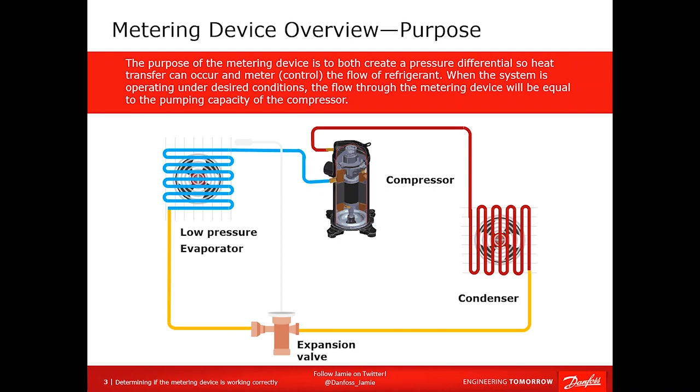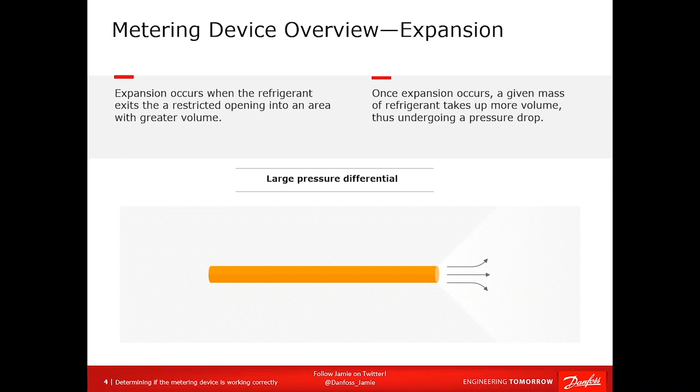The second thing is it has to inject refrigerant into the evaporator at a saturated state to replace what is boiling off into a vapor and being sucked in by the compressor. Otherwise, your evaporator would run out of liquid and things wouldn't work that great. So what does the expansion part mean? Well, when you go through a metering device, you're either going through a small opening or down a narrow tube, and you have high pressure, confined spaces, friction losses, etc. When you leave that confined space, you suddenly increase in volume. And since you are expanding, a given mass of refrigerant taking up more volume is going to undergo a pressure drop. And this is key to how a metering device maintains a low temperature in the evaporator.

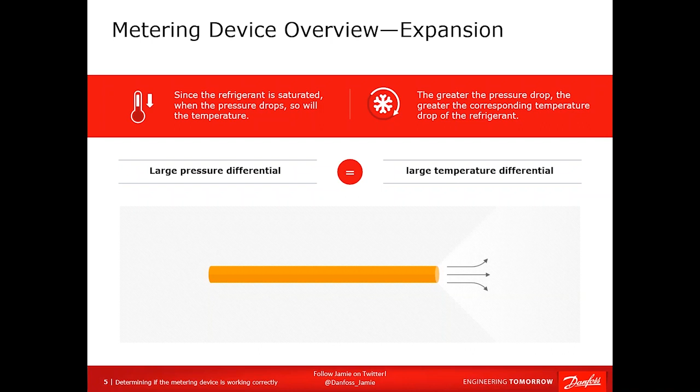Why? Well, the refrigerant is saturated. If it's saturated, vapor and liquid, you have that pressure temperature relationship. So you have liquid leaving, some vapor leaving, you have a pressure drop, you therefore have a temperature drop. But remember, there is no net energy change in the refrigerant. The refrigerant leaving the metering device has the same BTUs per pound as it does when it leaves the condenser. So flash gas. Flash gas is the vapor part of the saturated condition. So when you leave a metering device and you get expansion, you get flash gas occurring.

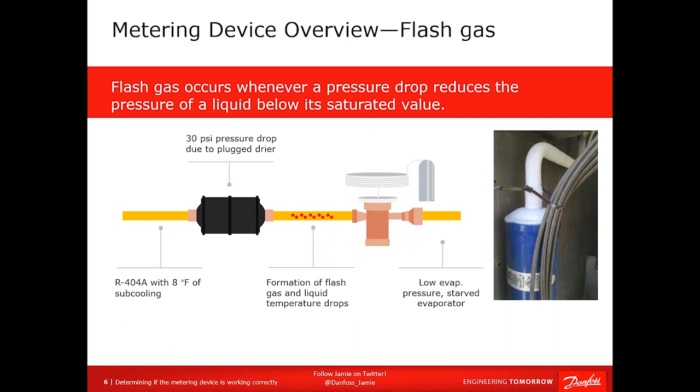Now, a lot of times we hear of flash gas as something that we don't want. If it occurs in a liquid line, it's really going to cause problems at the metering device. However, flash gas is just the ordinary outcome of any pressure drop that is equivalent to or greater than the subcooling of the refrigerant. So you'll see situations where this can occur in plugged components in a liquid line, but in the metering device, this is a necessity that we have to have in order for that refrigerant to drop in temperature. Why? Well, simple. Saturated R134A at 100 degrees contains 45 BTUs per pound.

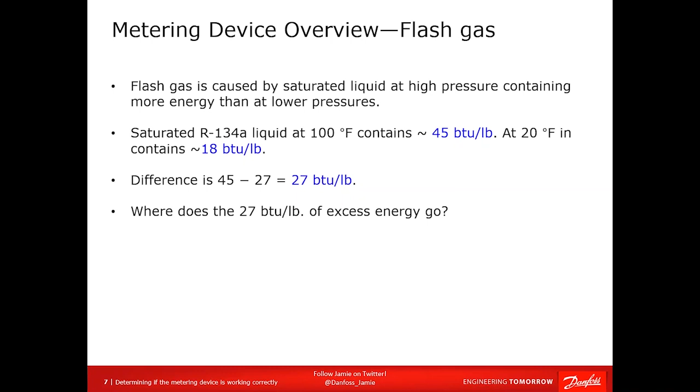If you want to inject it at 20 degrees into the evaporator, well, saturated 100% liquid at 20 degrees only can contain 18 BTUs a pound. That means there's a difference of 27 BTUs per pound that you need to account for in order to have liquid or saturated liquid at 20 degrees. So where does the 27 BTUs per pound of excess energy go? It goes into making that flash gas.

Now remember, vapor holds 5, 6, 7 times more energy than liquid does at the same temperature and pressure. So by dropping the pressure around the liquid, it suddenly boils, it flashes very rapidly and forms this vapor. And that vapor is what holds that excessive energy. So if you want to know how much vapor you're going to produce in the previous example where we had 27 BTUs of excess energy, well, you're going to produce 27 BTUs worth of vapor, and the remaining liquid is going to be at saturation.

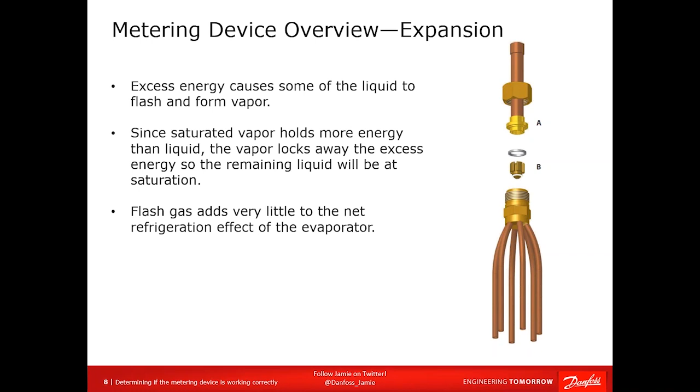Now, the liquid does all the work in the evaporator, going from a liquid to a vapor. The flash gas does very little. It's just along for the ride until the very end. All right, so if you can reduce flash gas by subcooling or pulling more heat on the high side, you can actually increase the amount of heat absorbed in the evaporator.

So let's start with the most simple metering devices. Simple openings, orifices, pistons. All right, you'll see a lot of these. You'll even see them in the large centrifugal chillers. They look like a floor drain. These are very simple metering devices. They have a given size opening, and the amount of flow that goes through a given orifice, all else the same, is determined by the pressure drop across it. So if you have a given pressure between the high side and low side, that pressure differential will determine how much flow goes through it.

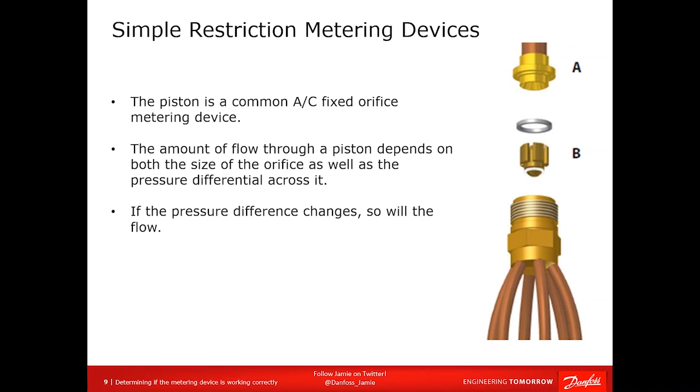And this is important because with pistons, as you'll see later on, the amount of flow and hence the amount of refrigerant in the evaporator, the amount of superheat and everything else is determined for a given set of conditions solely by the pressure difference across it. So with a cap tube, you size a cap tube for a given refrigerant and a given set of conditions, you size it for a given capacity. And the lower the operating temperature, the smaller the capacity, the longer you are going to have a given size of cap tube. So if you shorten a piece of cap tube, you'll end up with more flow through it and a higher evaporator pressure and temperature. So once again, cap tubes are cut to size based on evaporator capacity, temperature, and differential pressure.

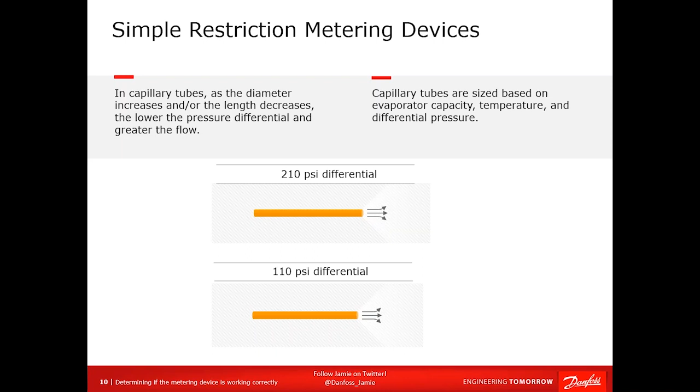If you've ever done this, you'll have the box with the cap tubes in it, and on the back or in a sheet of paper or document, you will have the size of cap tube and the length you need to cut it for a given set of conditions. Now, cap tubes are a little different than pistons because you don't have that 100% relationship between pressure difference and how much flow goes through it. And that is simply because cap tubes also have a friction element to it. Now, getting into this is beyond this presentation, but again, they just don't have that same simple pressure flow relationship like pistons.

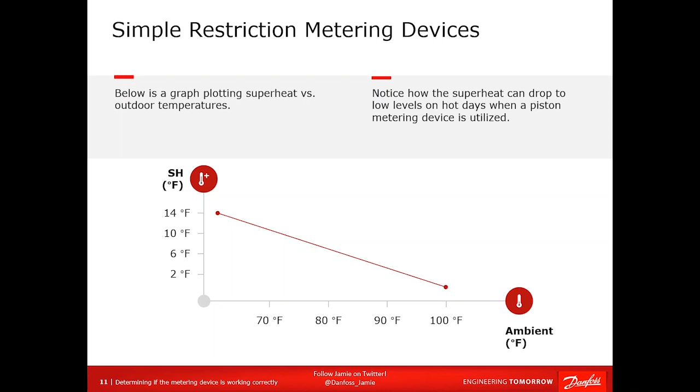If you artificially inflate the pressure or temperature in the condenser by 10 or 15 degrees, either by overcharging or poor airflow, you can easily get into a situation where you are going to flood the compressor. And this is a problem because a lot of compressors come back, even scrolls, with seized bearings smashed all up inside. And really, a lot of it comes down to this type of situation.

So you've got a fixed metering device in your system. How do you tell if it's performing correctly? Well, straightforward, it's compared to the manufacturer's literature. So if you have an AC system, and we'll see in a second, it will tell you exactly how much superheat you should have for a given outdoor and indoor condition. In fact, this is what you use to charge a system. So if you're not familiar with this chart and you've been charging systems, something wonky is going on.

So if your superheat is too high or too low for a given ambient condition, keep in mind these are not adaptable controls. It's not like there's a knob on the side of a piston or a cap tube that you can turn that suddenly gives you less or more refrigerant like you can on a TXV. So it really comes down to what is going on in the system. Is the metering device sized properly? Is it plugged? All these kinds of things now come into play.

So if your evaporator temperature is too low and your superheat is too high, then look upstream for any obstructions. You do this anyways, regardless of what's going on. If you have that low pressure, high superheat type of scenario, look for plugged filter dryers or plugged valves or whatever happens to be upstream. Also, if you have a cap tube, make sure it itself is not plugged. If you have what looks like pure liquid entering into a cap tube, and you're getting very low flow on the other side, there's a good chance it is going to be plugged with wax or something like that.

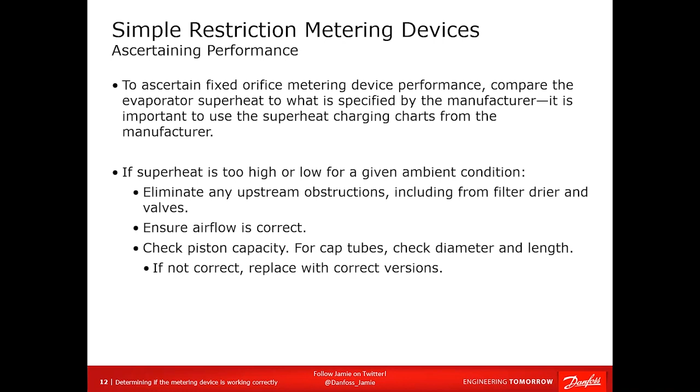If your evaporator temperature is low and your superheat is low, make sure you have enough airflow and that your evaporator isn't iced up. And once again, check the piston capacity. If you have to pull it out, check to make sure you have the right one. If you have a piston that is too large, expect high evaporator temperatures, low superheat. In fact, you could probably expect flooding of the compressor on hot days. Once again, for cap tubes, a little more involved, check the diameter and the length and compare it to what the system is supposed to be. Believe it or not, when a cap tube is sized right and cut right, it feeds beautifully, especially on indoor applications where you have a relatively constant condensing.

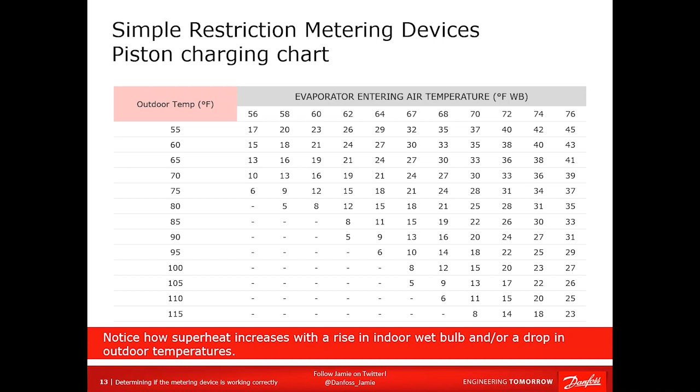However, if it is hot outside, really hot, like 100 degrees or 105 degrees, and it's not wet inside, you don't have high humidity, now you're going to flood the compressor. So these systems have to be tailored for regional variances. If you live in a place where the air is very dry, you have to size a system differently, the piston, than what you would if you lived in, say, Atlanta or Alabama, where it's both hot and humid.

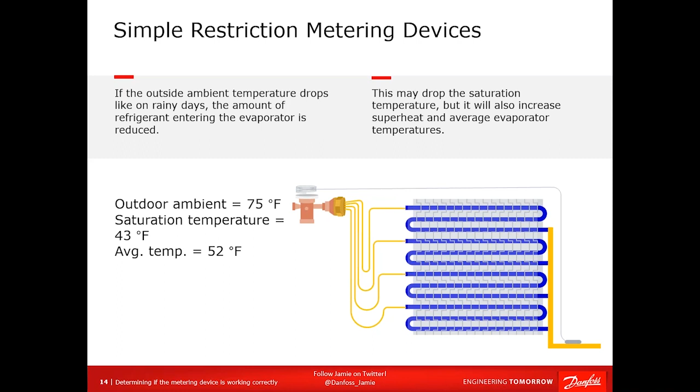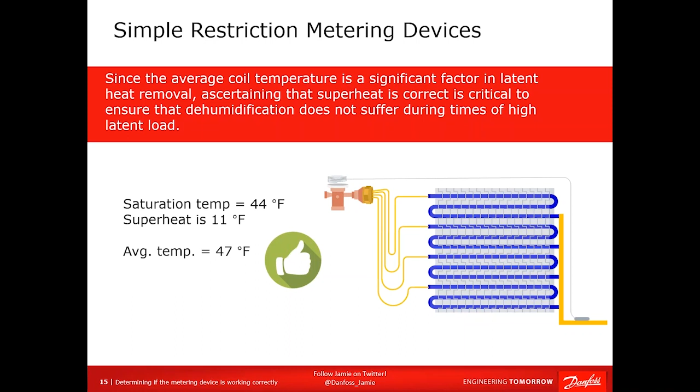In other words, it doesn't matter if it's sensible or latent heat, you end up with more capacity to match that load, which means you get lower superheat, lower average coil temperatures, and better dehumidification, like you can see in this picture here. All right. Again, I could spend a whole presentation on just this one area, and we don't have time. But one of the biggest selling points of an adaptable control like a TXV is simply when it comes to that dehumidification. Why? Well, here you go.

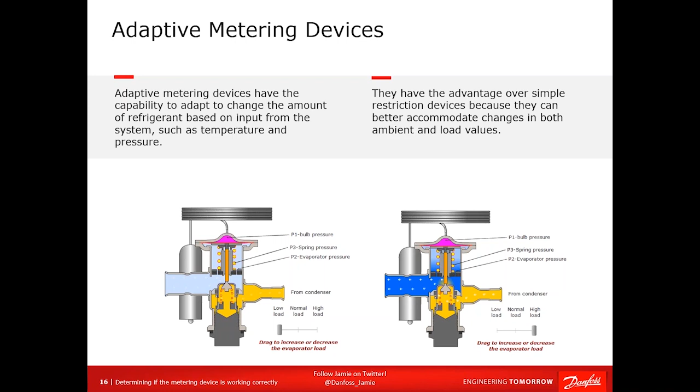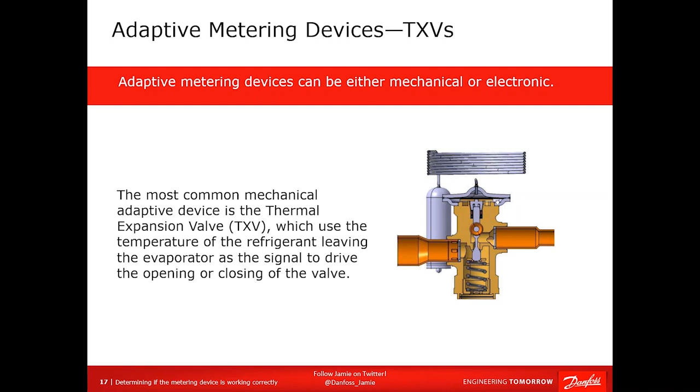So TXVs are very, very common nowadays in AC. All right. And of course, in refrigeration systems, larger refrigeration systems, they have been there for a long time. However, on the AC front, residential AC really changed in 2006 when SEER 13 came in. It was during that period of time when efficiency increases were mandated in AC, and a lot of manufacturers went with TXV, and the entire market turned upside down, where the majority of metering devices going out switched from pistons to TXVs because they could get you a large chunk of the way there as far as necessary efficiency goes.

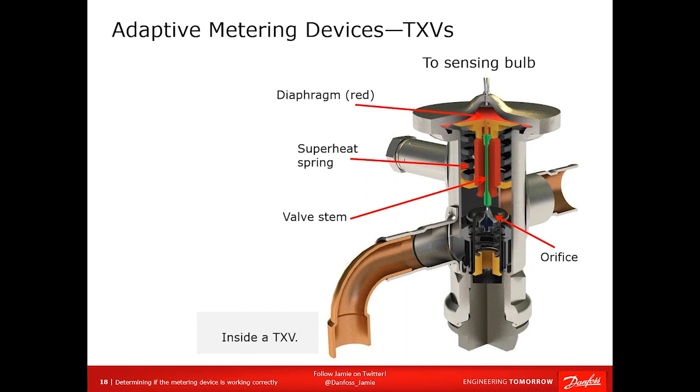So looking inside of one, this is a cutaway of one of our refrigeration TXVs. In fact, it's one designed for ice machines. And you'll notice that at the top, you have your diaphragm. You have a pressure plate in beige underneath it. And then you have your valve stem in green. The superheat spring surrounds that and is adjusted by the stem on the left. Near the middle there, the black, you'll see that's the orifice. So when the sensing bulb pressure increases, it causes the diaphragm, in red, to be pushed down against the spring, pushing that orifice pin down in the middle, opening up the orifice and allowing more flow through here. In this case, the flow goes from left to right. If I reduce superheat, I reduce the force of that spring, allowing the valve to open up with less superheat.

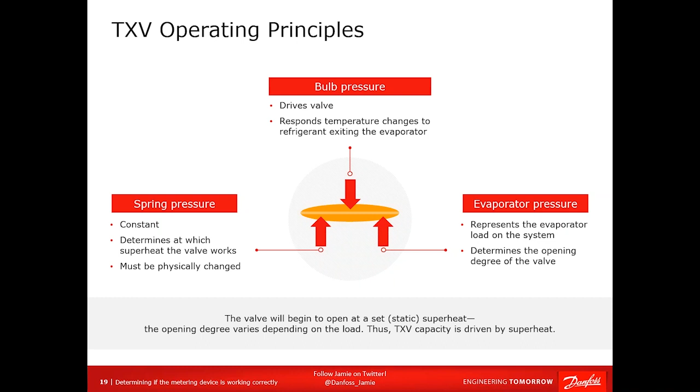So there's two key things to remember here. Number one, the bulb pressure is the only opening force. The evaporator and spring pressure are both closing forces. So in order for the bulb to cause the TXV to open up, it has to overcome both spring and evaporator pressure. Now, that's why you don't have a TXV opening up at 0 degrees superheat, because of the contribution of your spring pressure. So if the valve is rated for 7 degrees of static superheat from the factory, it means that you need at least 7 degrees of superheat for the bulb pressure to be high enough to overcome that spring pressure. So when you adjust the superheat on a TXV, you are really increasing or decreasing the contribution that that spring puts in.

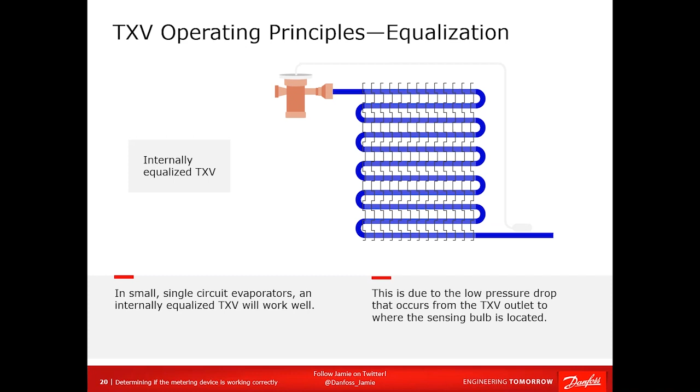Next important point here is internal versus external equalized TXVs. I see a lot of questions, a lot of discussion on this. A lot of people don't seem to understand the underlying reasons why you may need an externally equalized TXV. Well, it's pretty straightforward. It all has to do with the pressure drop that occurs between the TXV outlet, the inlet of the evaporator, and where the sensing bulb is located at the outlet of the evaporator. If you have a small pressure drop, equivalent to a couple of degrees, let's say, the internally equalized TXV will work just fine.

However, if you have a multi-circuited evaporator, one that has multiple circuits to allow for a more even evaporator face temperature, then you have to use a distributor. And refrigerant distributors are notorious for having very high pressure drop, anywhere from 5 to 30 pounds. Now, here's the rub. Whatever temperature equivalent that pressure drop is equal to, you're going to have to add to the superheat setting of the TXV, because the TXV doesn't know there's a pressure drop downstream of it if it's internally equalized. So it thinks the evaporator saturation temperature is much higher than it really is. It might think it's 40 degrees when in fact it's 25. So whatever temperature difference that pressure equivalent is equal to, you would add to the opening, static superheat.

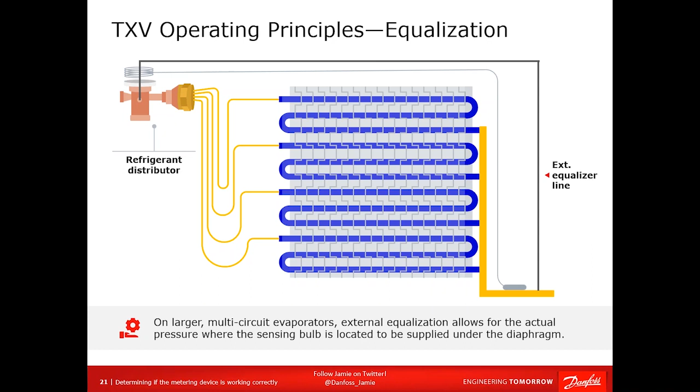So if you had a 10-degree equivalent pressure drop and the static superheat on the valve from the factory was 7 degrees, 10 plus 7 is 17. Your valve would not even open up until you had 17 degrees of superheat. You would always underfeed the evaporator, and it would be a disaster. So by going with an external equalized valve and attaching the external equalizer line just downstream of the sensing bulb, you get the actual saturation pressure where the sensing bulb is located, applied under the diaphragm, so that you have like for like forces on that diaphragm.

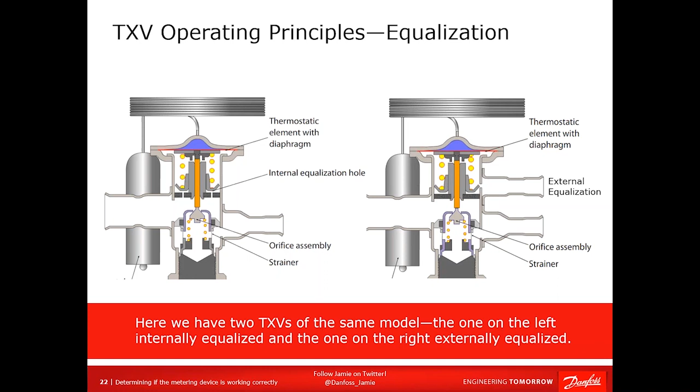So here we have two TXVs. Both of these are TUAEs. The one on the left is internal equalized. You can see the opening in this area right here that allows the evaporator pressure up and under the diaphragm. The one on the right, it's closed off, but we have an opening on the side. So we cannot let the evaporator pressure here up there. We take it from the outlet of the evaporator after all the pressure drops and apply it up under that diaphragm. So once again, you get a much more accurate picture of what the conditions are inside the pipe where the sensing bulb is.

So the rule is you can use an external equalized TXV even if you don't need one. You still have to connect the external equalization line. Keep that in mind. However, you can never use an internal equalized one if you require an external equalized TXV. If you have a distributor, you absolutely should have an external equalized TXV. That's why you'll always see external equalized TXVs on air conditioning systems.

So, superheat and load. Different manufacturers take different approaches to this based on what mixture they put in the bulb charge, and we'll talk about bulb charges in a second. However, in order for you to compress that superheat spring, the more you push down, the harder it pushes back up again. So you need more bulb force to continue opening that TXV. To drive it wide open takes much higher bulb pressure. Now, you can increase some of that bulb pressure just by having a different mixture. However, you're always going to have an increase in superheat under high load. It's not going to be as much as you would with a piston or a cap tube or whatever, but there is going to be some. It might be 4 or 5 degrees of superheat difference between closed and your rated capacity.

And we call this opening superheat. When you measure superheat leaving the evaporator, you're measuring operating superheat. And that is both your opening and static superheat combined. So if somebody says, I've got 12 degrees of superheat at the evaporator outlet and your static superheat is 7, you have 5 degrees of opening. And every TXV has a certain amount of superheat to drive it to its rated capacity. However, all TXVs that I've ever run across have what's called reserve capacity or extra capacity. It might be 20, 30, 40% above what it's rated for.

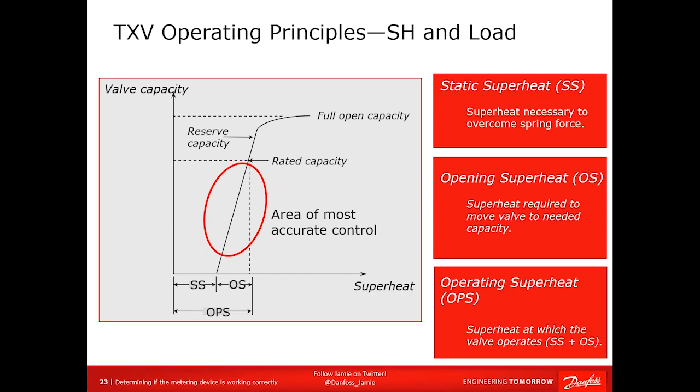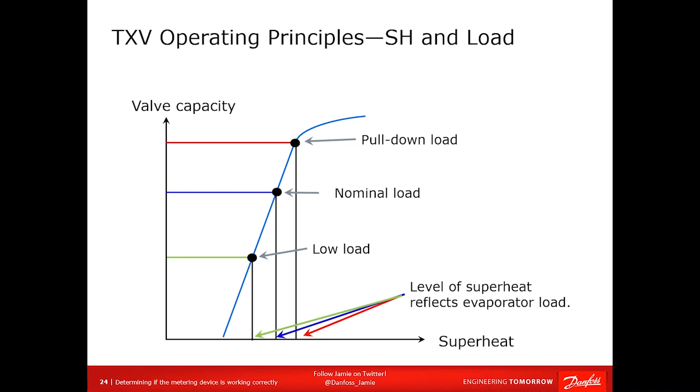Why don't we rate it for a 1.4 ton valve instead of 1 ton? Well, because that is really not a place we want that valve to be running all the time, because it doesn't have that same accuracy as far as amount of opening compared to a given amount of superheat. It is far more accurate in this area down here. And this is really where we want to operate most of the time. If you're in pull down mode, it's okay to be up here for a short period of time until you get that load pulled down, but you don't want it operating up there all the time. So once again, your superheat is reflective of your load. Some manufacturers will have less change, some will have more, but all of them will have some.

Okay, now the important part. In order for you to understand if a TXV is working correctly, you have to understand what it does under different conditions. So you can tell if there is something wrong with the valve itself, or if there is something wrong in the rest of the system. So you have to know what the TXV is going to do, what you expect. Because if you don't, how are you going to know if it's operating properly or not?

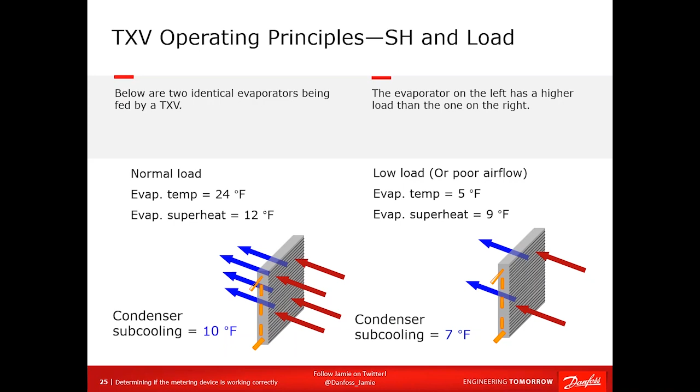So before you add refrigerant, check all 3 of these parameters. Before you adjust superheat, check the 2 parameters, evaporator temperature and superheat, and verify them before you make adjustments. Because if you go making adjustments or adding refrigerant, and that's not the problem, now you've just added more issues to deal with. And the more unknowns you have, the harder it is to solve a problem.

So let's look at the next part, that mystery material that's inside of the sensing bulb. Now, a lot of people think, oh, it's got the refrigerant in there. It's an R404A system, it's got 404A refrigerant in there. No, it does not. These have not been charged with straight refrigerant since, I don't know, Carrier was alive. It is a mixture of different gases or different chemicals depending on what you want to do. Yes, it probably will have R404A in there, but it will also have a bunch of other stuff like nitrogen and some hydrocarbons, or who knows what it's going to have in there.

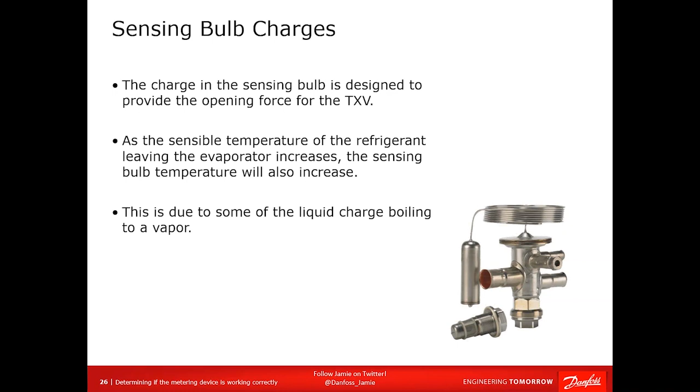But really, what you want to do here is have this work over a wide temperature range. In order to do that, you're going to have some of the material, some of the liquid in there, boil off quicker and some boil off slower, so that you can tailor how that valve reacts to a change in load. Now, the wider the operating temperature you want to work at, without having to change bulb charges, the more complex the bulb charge has to be. So with our N charge, we work from -40 to +50. It's great. But we also have a multitude of different materials in that charge. It's not just straight refrigerant.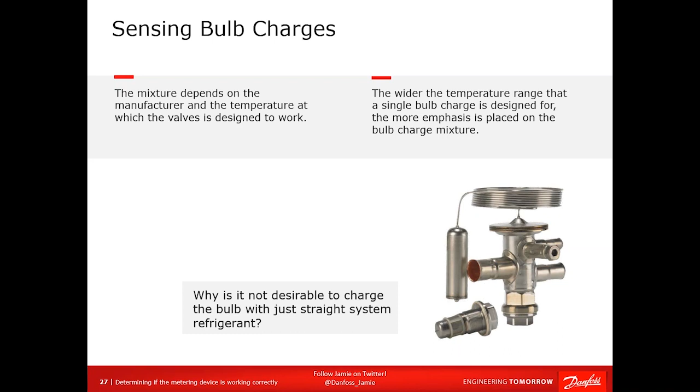So the question is, why would you not want to put straight refrigerant in there? It's very straightforward, because the amount of pressure required to change the temperature a certain amount, or vice versa, the amount of temperature change that's required to change the pressure, is not constant in refrigerants. In other words, the amount of pressure change for a given temperature change is much smaller at low temperature than it is at higher temperature. So if you look at the chart here, we're going from 15.7 to 19.3. That's 3.6 psi to give you a 5-degree temperature change. Whereas on the right, it requires a 17-pound difference to give you a 5-degree temperature change.

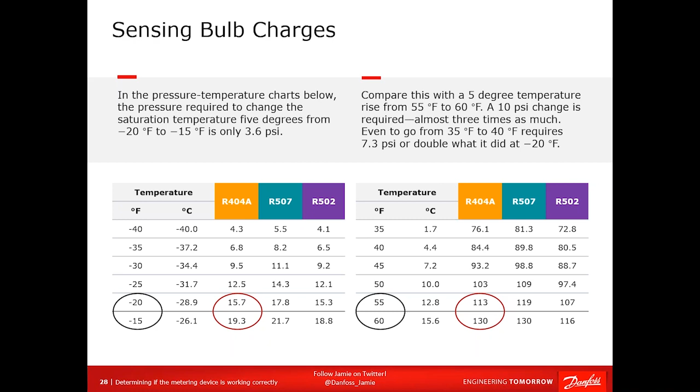So even if we don't go to that extreme, you can still see what the problem is going to be. And it comes down to this, the superheat spring. The superheat spring applies the same amount of force, whether you're running at -40 or +50. It doesn't know the refrigerant temperature. All it does is push back a certain amount. Now, nominal ratings for a TXV are done at 40 degrees Fahrenheit. So if we say this spring force is equivalent to 7 degrees of superheat, that is at 40 degrees. So if we look at a 7-degree change at 40 degrees, that is 12 psi. In other words, this spring pressure always pushes with 12 psi of force.

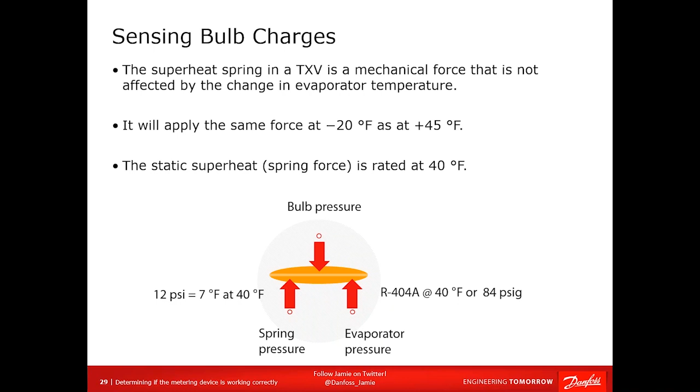All right, so what's that mean? Well, if you're going to run this thing at -20, and you want to overcome 12 psi of force, look how much superheat you're going to have. It's not going to be 7 degrees at -20. It's going to be a lot more than that, because 5 degrees is only 3.6 psi change. So how are you going to get 12 psi?

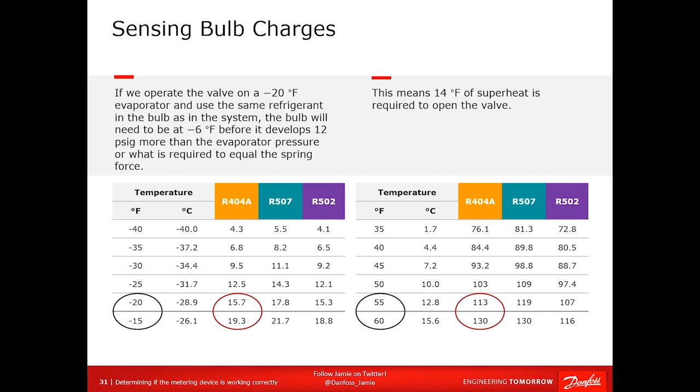Well, in this case, you're going to have to bump the temperature from -20 to -6 before you get 12 psig. This means you're not going to open that valve unless you have 14 degrees of superheat. So you will find that your opening superheat goes up at low temperatures if you were just to use a standard refrigerant, and vice versa.

At high temperature, you would overcome that spring pressure with very little superheat, possibly causing the evaporator to be unstable. That's why we always use a mixture. Okay, so how do you know if the TXV is operating correctly?

Well, that previous example that you saw where we had a drop in load and a drop in evaporator temperature, a drop in superheat, and stable subcooling, I gave that as an example of something that's not a metering device problem. There is no change that you can make at this point that is going to improve that situation. So it's either going to be an airflow change or a defrosting situation or something else that needs to be addressed.

So always make sure you check airflow. Make sure that you have the correct airflow for the situation. Otherwise, if you don't have correct airflow, none of this other stuff matters. There's nothing you can do that's going to improve it, because you're not going to have the load that the system was designed to have. So check what your airflow is. It's going to be over a range, but you can compare it to what the manufacturer wants, or you can look at the system. If it's a block of ice, there's something wrong.

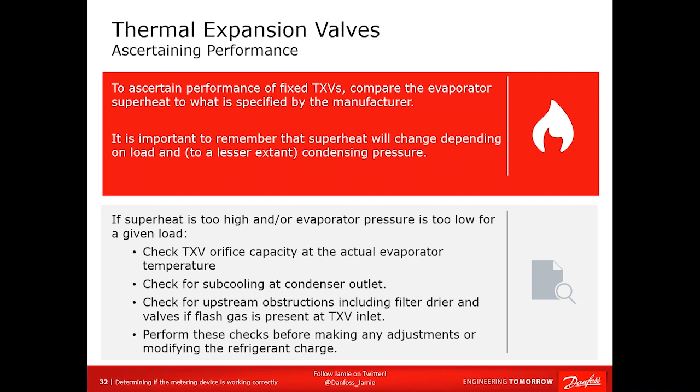And if you have flash gas at your metering device, you're trying to force vapor through a little tiny opening. That's going to be a problem. So you're going to end up with a low evaporator temperature and high superheat because you don't have enough refrigerant for the load. So make sure you do these checks before you do anything else. Trust me on this one. I've been burned myself with this. So it's a very quick check. Your hands, your eyes, and your ears will tell you a whole lot about this, okay? Without ever having to take out a tool other than maybe a thermocouple to take a measurement.

All right. So a low evaporator pressure must be accompanied by high superheat to indicate a lack of refrigerant in the evaporator. If you have low evaporator temperature and low superheat, that is a load issue, and you must treat it and solve the problem as a load issue. If pressure and superheat are low, once again, check your airflow. Check to see what is going on. All right. If everything else is okay and you've eliminated all these other possible problems, you can adjust superheat.

Remember, when you adjust superheat, the valve will react instantaneously. In other words, if you reduce superheat, the valve will immediately inject more refrigerant into the evaporator, and your evaporator temperature will go up and your superheat will go down, and vice versa. The reason we tell you to wait 10 minutes is for the system to stabilize, and this is very important. However, if you're determining if the TXV is functional or not, as soon as you put a couple of turns in, if you see no response, something is wrong inside the valve.

So hold the sensing bulb in your hand and warm it up. Don't put a torch on it. Don't put it in boiling water, anything stupid. Just hold it in your hand and warm it up. If you see a response, this tells you the valve was probably stuck and the larger pressure differential was enough to overcome any issues. However, if there is no response, then one of two things: the valve is really plugged or you've lost your bulb charge. It doesn't matter. The valve's got to come out.

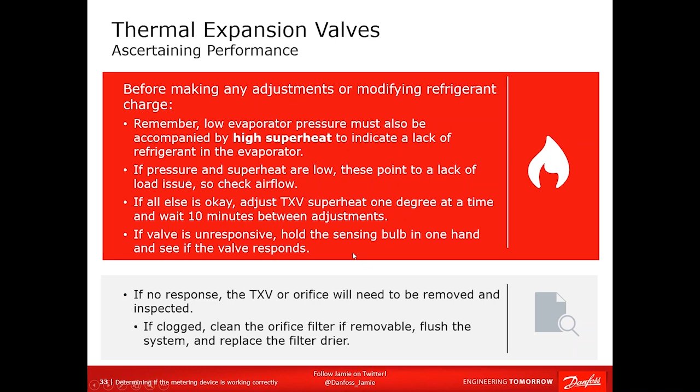All right. Well, before you condemn the TXV, take a look at the liquid inlet. You'll see a screen there. It may be removable, like in the TUA, or it may not be. But even if it's not removable, if you see it's plugged up, that tells you the reason for the failure. The recommendation then, of course, is to replace the TXV, replace the filter drier, and wonder why it didn't catch the problem, right? And I would recommend flushing the system because you've obviously got debris in there that's going to cause a problem. All right, that's my recommendation on what to do.

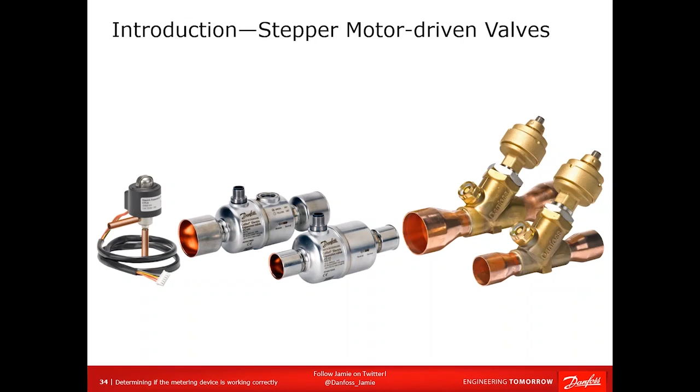Okay, finally, we're going to deal with electronic expansion valves. Now, just like TXVs made an entranceway into lower end systems, electronic expansion valves are now making their way in. Just like anti-lock brakes, right? The first vehicle to have anti-lock brakes was the Concorde. The second one was probably some $500,000 car somewhere. Now you can buy them on your Hyundai, whatever the thing is, right? They come with anti-lock brakes.

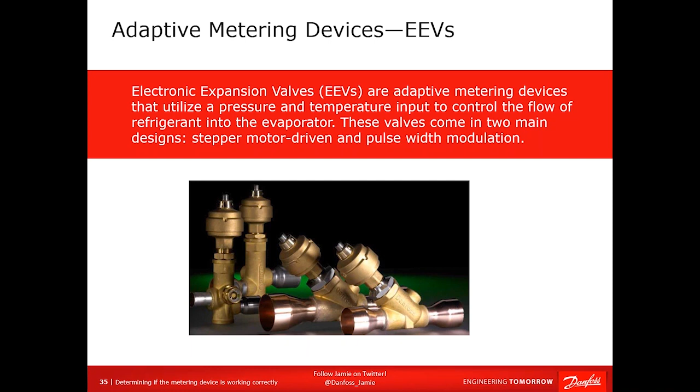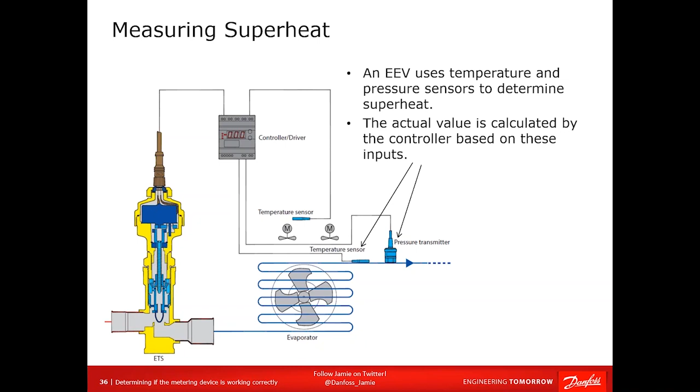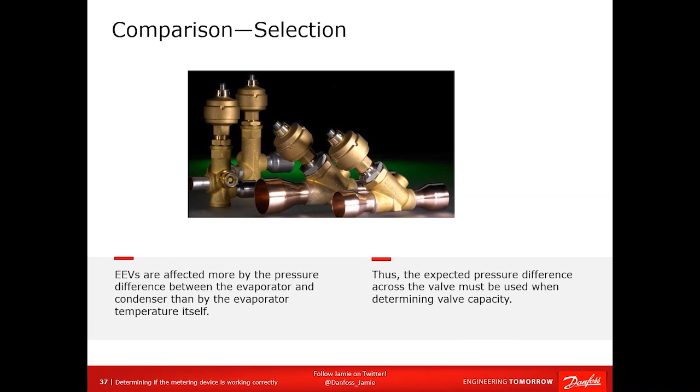So electronic expansion valves are adaptive metering devices that basically utilize a pressure and temperature input to a controller. And the controller uses that information to determine superheat. And based on a set of algorithms, it will either open or close the EEV, electronic expansion valve, based on that value. Now, the main thing that determines how much flow goes through a given electronic expansion valve is the pressure difference across it. Remember, electronic expansion valves, when they say 5 tons, they mean 5 tons. There isn't 20, 30, 40% reserve capacity like there is in a TXV. So if your TXV has been operating using that excessive capacity and you replace it with an EEV of the same nominal capacity, you're going to be in trouble because it doesn't have that surplus capacity.

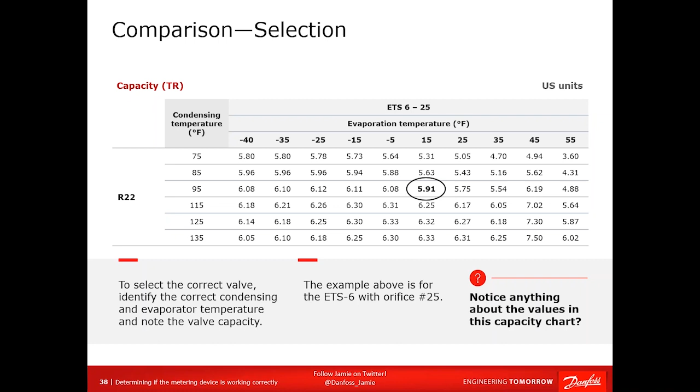Now, notice something here. If you were to size a TXV, you would notice a huge difference at a given condensing temperature between -40 and +55, right? With electronic expansion valves, you don't see that. It is based solely on the pressure differential, and they will give you gobs of capacity at -40, and they will give you gobs of capacity at 45 degrees. It all depends on the pressure differential. And the nice thing is you can tailor how they open, right, in your controller.

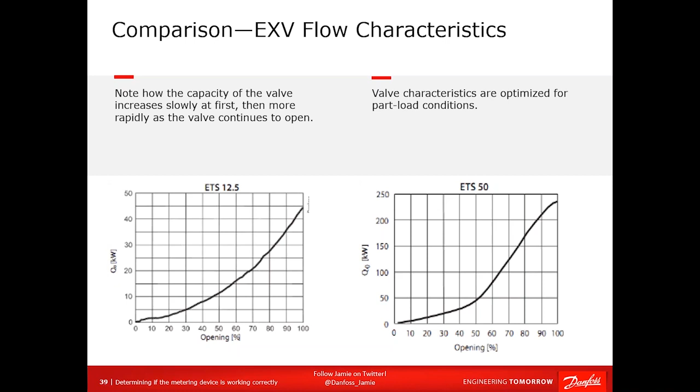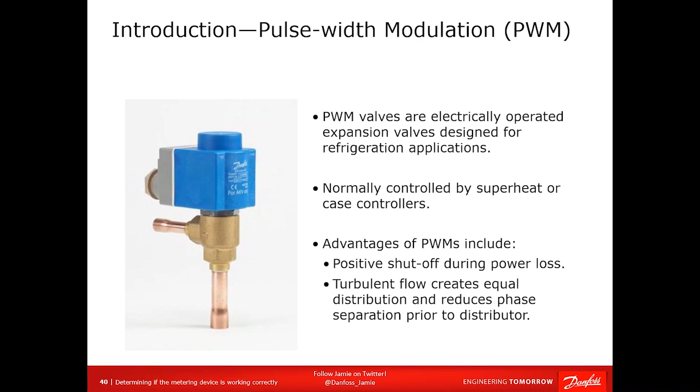So you can see that you can set these up to open up slow at low load to allow fine control, and the thing can ramp up quickly at high load to really match load change. So the one type that we have of 2 is pulse width modulated. This is like a high quality, long life solenoid valve. It's either open or it's closed. And the benefit is if it's open, it's 100% open. It creates nice turbulent flow, good oil return, on and on and on.

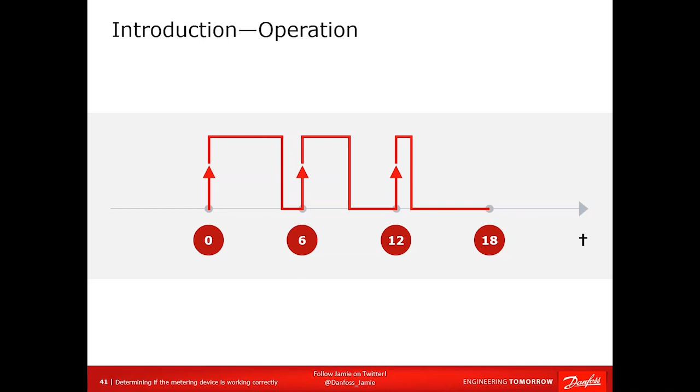There have been some changes to them to make them less prone to hammering and noise, and that's been a big advantage. However, being an on or off control and nothing in the middle, it is either on or off. And how long it stays open determines how much capacity you have. Danfoss uses 6-second intervals. If you want 50% capacity, you're open for 3 of the 6 seconds. If you want 100% capacity, you're open for 6 of the 6 seconds. So the valve is constantly opening and closing.

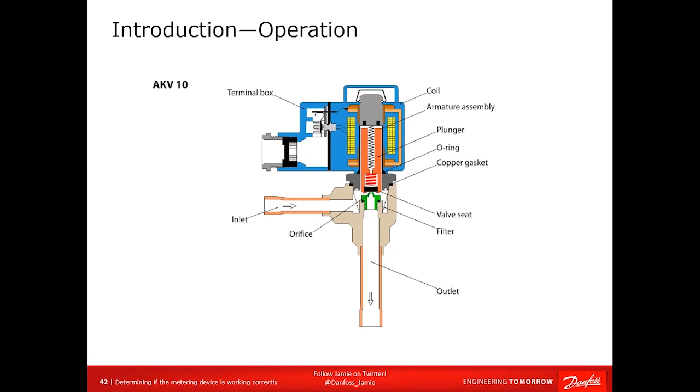And if you know what a solenoid valve looks like inside, you'll recognize this. There's your valve seat, your orifice, and your plunger. You energize that coil, the plunger will lift up and separate and center itself in the magnetic field, moving away from the orifice and allowing flow to go through. De-energize the coil, and the spring in the middle of the plunger will push it back down into the closed position.

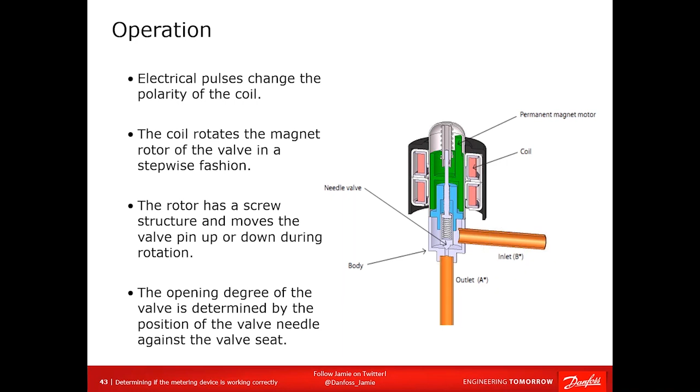The other type of electronic expansion valve is the stepper motor, and the stepper motor has an actual motor. And the motor turns in one direction or another depending on the polarity that you send to it. And in doing so, it turns a threaded rod in the middle that either threads down or up. And attached to that is a needle valve. Thread it down and the needle valve closes against the seat. Thread it up and it opens. So these operate over a set of steps. And whether it's opening or closing, once again, depends on the polarity.

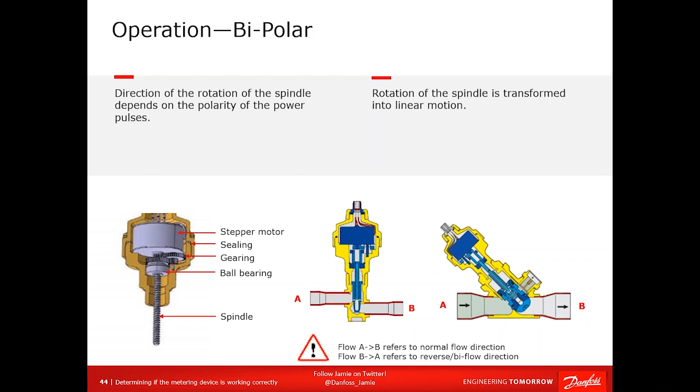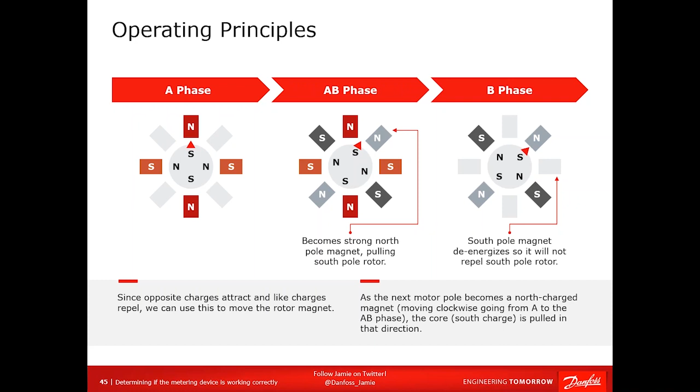So you might have these things with anything from 50 steps between full open and full close to like 600 steps between full open and full close. And you can select that to basically control how slowly or quickly the valve opens up and how accurate it can be. So the motor works off an opposite charges attract principle. So you can see the outer magnet and the permanent inside magnet. Whenever you move that north pole around, the south pole of the inner magnet is going to be attracted to it and it's going to turn towards it. And so you can literally step this thing around in a circle by changing the polarity of the outside magnet. And to make it go the opposite direction, you just reverse the polarity of the outside magnets and it starts to push it in the opposite direction, closing the valve.

So let's leave with this here. Minimum stable superheat. A lot of people don't understand why a TXV starts to hunt if you reduce superheat too much, and why it would only hunt during certain periods. Well, the reason is this. When the evaporator tube has lots of liquid in it, it's not a problem. There's enough weight there to hold it all down, and the vapor stays on top. But as soon as the liquid fraction drops below a certain amount, there's enough vapor to start lifting the liquid up away from the wall.

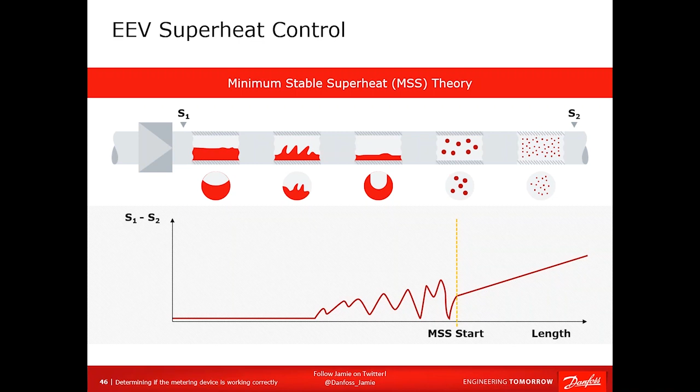And you can literally have vapor that's superheated 2, 3, 4 degrees against the pipe with liquid floating in the middle. And of course, that mixes. It's not uniform or laminar. So you will replace that superheated vapor with liquid and go from 3 to 0 degrees of superheat. This drives TXVs nuts because they're trying to determine the superheat. So what do they do? They open and close. So the minimum stable superheat is the amount of superheat for a given evaporator that guarantees you no mixing and dry vapor at the outlet.

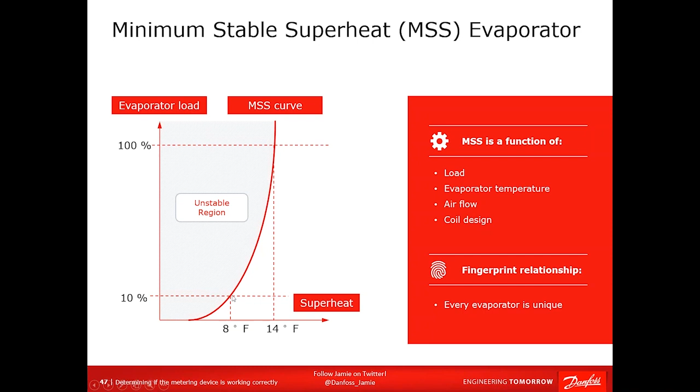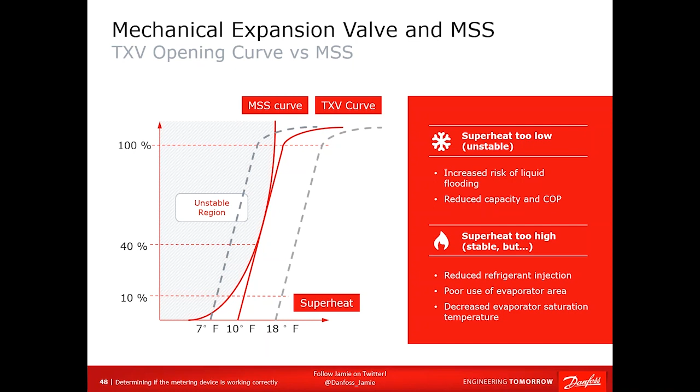And it is a curve, and each evaporator has a slightly different curve. So you can see that the minimum stable superheat is lower at low load compared to high load, but it's a unique fingerprint for each evaporator. Now compare that to a TXV, which is linear, and you're putting a straight line against a circle or a curve. It's only going to touch in one place. Where it doesn't touch, the TXV demands higher superheat than what the evaporator needs. If you try and adjust your superheat too low, you put your TXV down into the unstable area and it doesn't work. If you put it too high, it's going to be stable, but now you're having too high of a superheat.

What an electronic expansion valve does is it's always trying to reduce superheat as low as possible. So it pushes it down, down, down until it starts to become unstable. Then it increases it a bit. So it's always hugging that minimum stable superheat curve, always guaranteeing you the lowest possible superheat. This allows you to operate your evaporator temperature a little bit higher, which means it lowers your compression ratio and saves you energy. It also gives you great dehumidification.

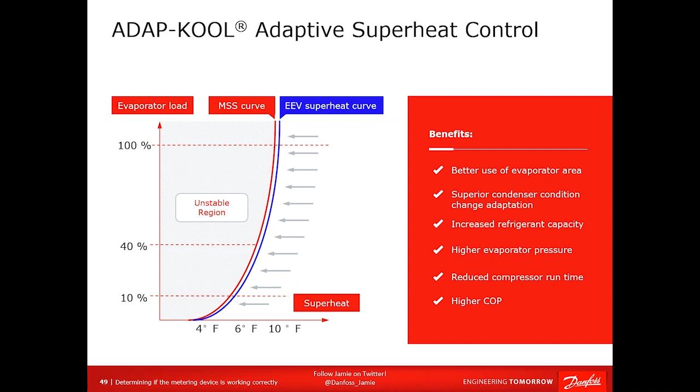So that's it. You have seen the difference between fixed and adaptive devices and how to really tell if they're working correctly or not. I wish I had more time, but unfortunately, we're out of time. Thank you for joining us today.